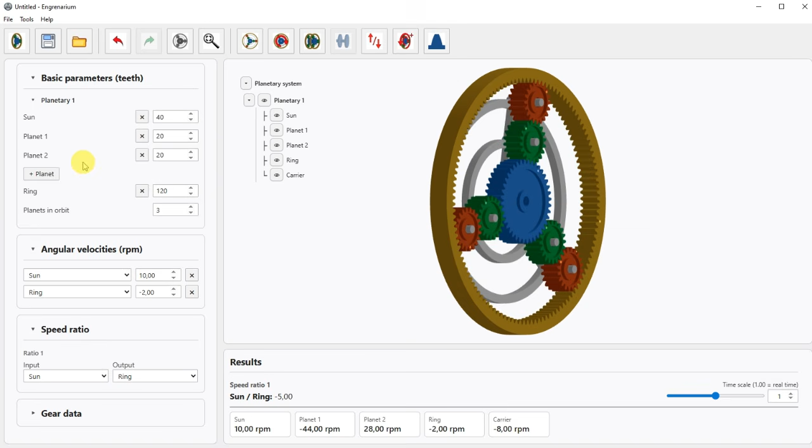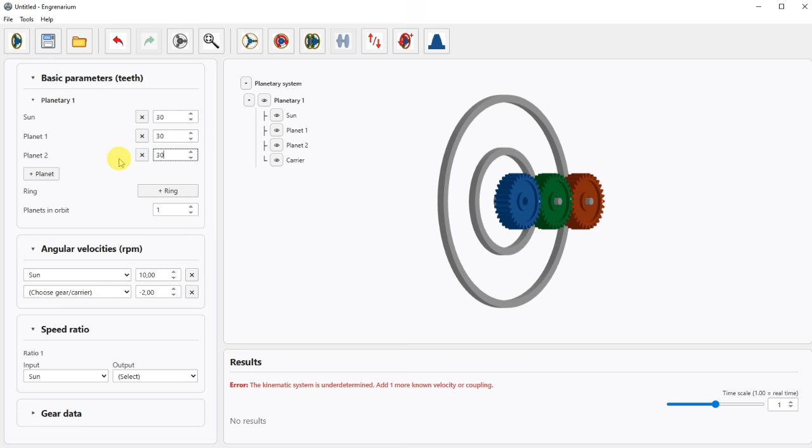Let us now learn how to build Ferguson's paradox mechanism so that we may then understand how it works. First, place 2 planet gears in series. Set each of them to 30 teeth. Then add 2 more similar planetary gear systems. Here comes the first secret of the mechanism. On the last gear of the second planetary system, set the number of teeth to 31. On the third planetary system, set it to 29 teeth.

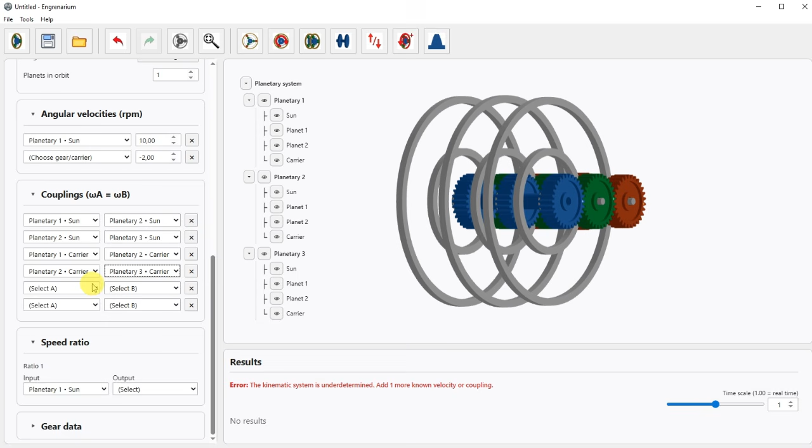Now make the proper couplings. The sun gears must behave as a single unit. Next, couple the carriers of the planetary systems. Then couple the first planet gear of each planetary system, so that they also behave as a single unit.

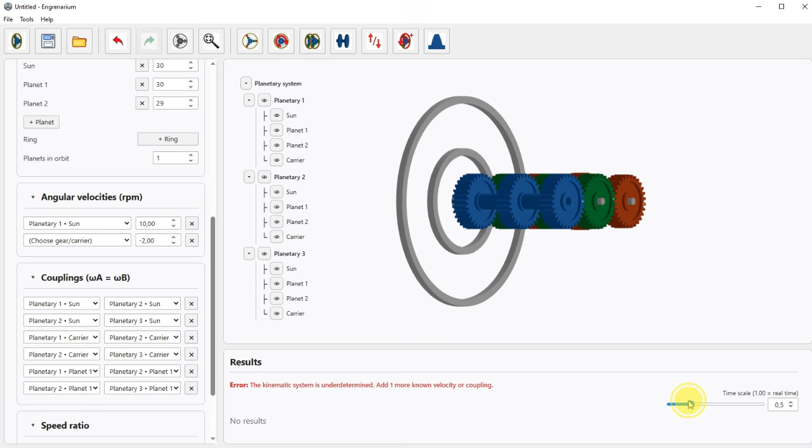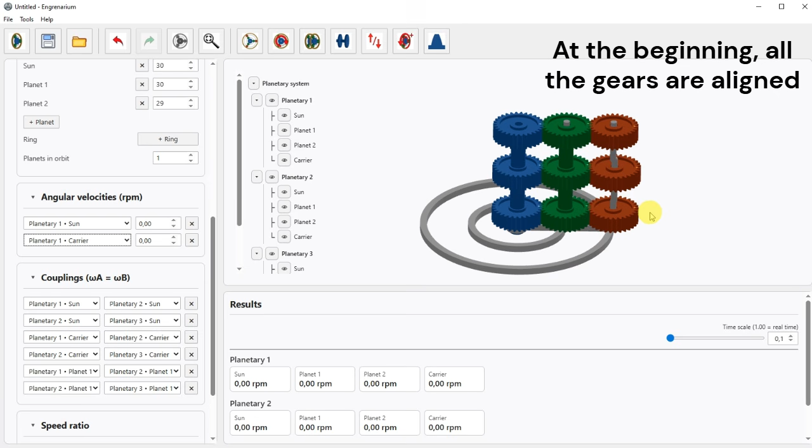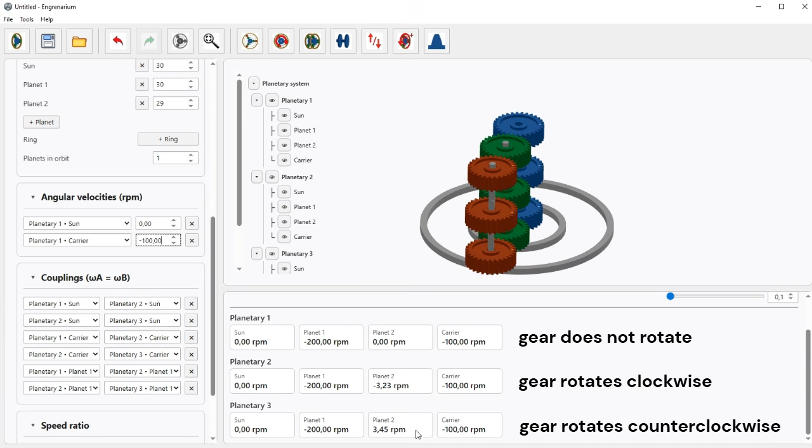Set the angular velocity of the sun gear to 0. Notice that, at the beginning, all the red gears are aligned. Set the carrier speed to -100 RPM so that it rotates clockwise. Observe how one of the gears does not rotate, another rotates clockwise, and the last one rotates counterclockwise.

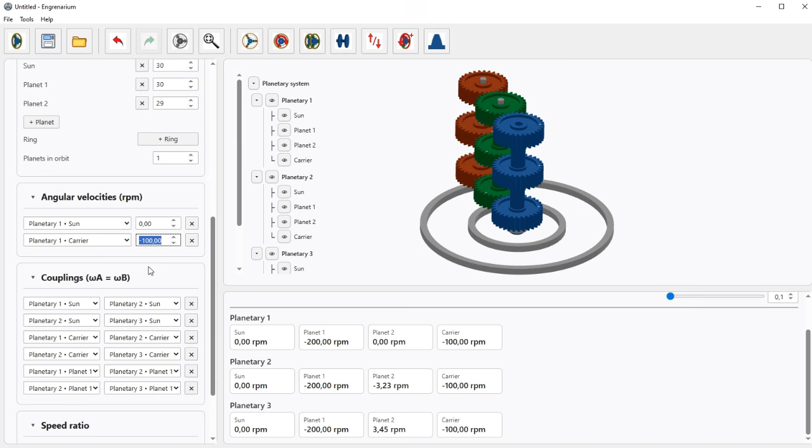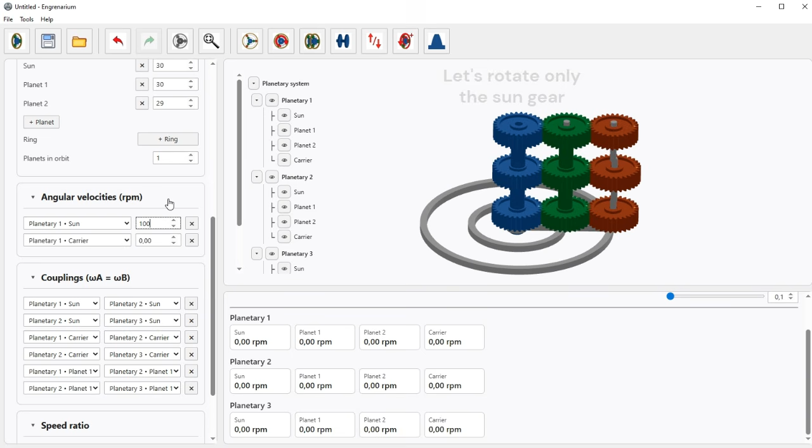When the planetary system is stopped, we can see how each gear has behaved. They truly rotate in 3 different ways. But how does this work? Let us rotate only the sun gear. All 3 gears rotate in the same direction. The differences in their speeds are due to the number of teeth on the red gears. With a difference of 1 tooth in each case, the speeds vary by about 3 RPM.

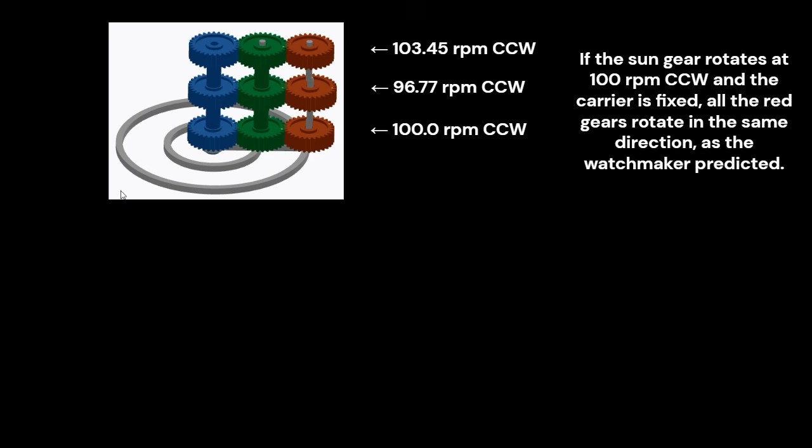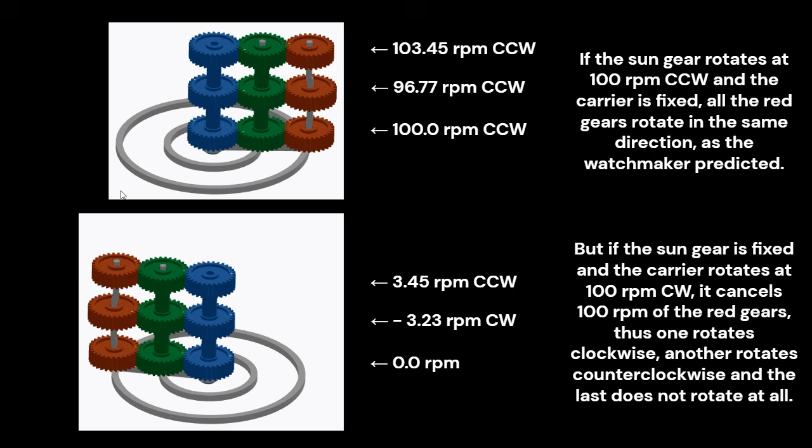If the sun gear rotates at 100 RPM counterclockwise and the carrier is fixed, all the red gears rotate in the same direction, just as the watchmaker predicted. But if the sun gear is fixed and the carrier rotates at 100 RPM clockwise, it cancels 100 RPM from the red gears. Thus, one rotates clockwise, another rotates counterclockwise, and the last does not rotate at all. Let us understand the mathematics behind it.

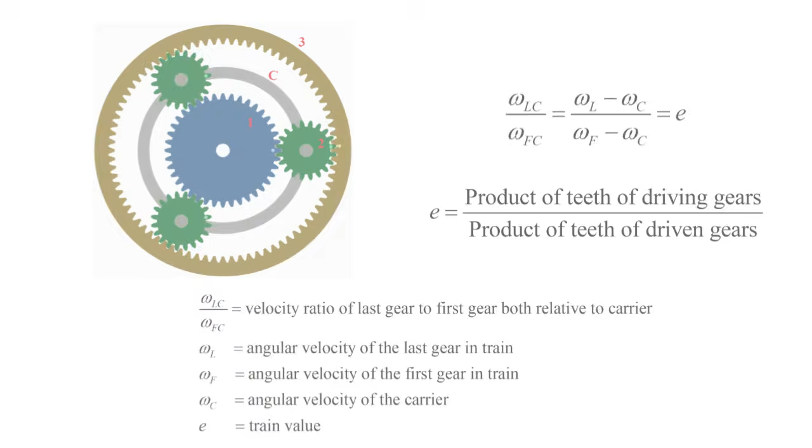When using the general formula for planetary gears, the idea is that when calculating the speed ratio of the last gear in a train relative to the first gear, with both measured relative to the carrier, the expression can be written as the angular velocity of the last gear minus the angular velocity of the carrier, divided by the angular velocity of the first gear minus the angular velocity of the carrier. This is equal to the train value, which is the product of the numbers of teeth of the driving gears divided by the product of the numbers of teeth of the driven gears. For this example, when assembling the train 1, 2, 3, the equation can be applied as shown.

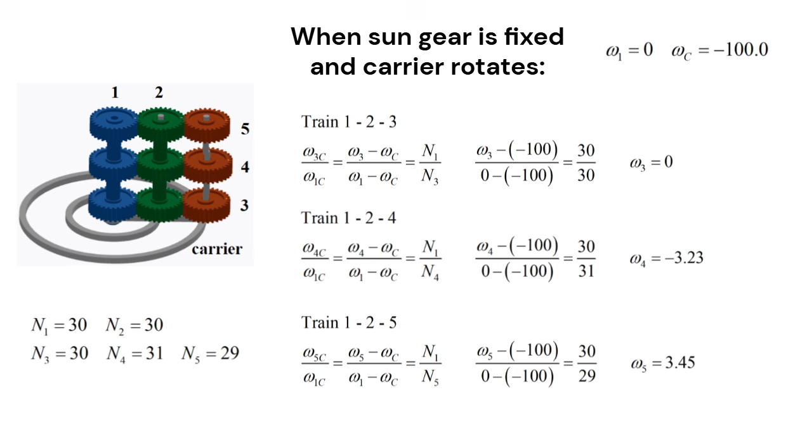Now, when the sun gear is fixed and the carrier rotates at 100 RPM clockwise, each of the gears has a different speed with different directions of rotation. For gear 3 with 30 teeth, the speed is 0, so it does not rotate. For gear 4 with 31 teeth, the speed is 3.23 RPM clockwise. For gear 5 with 29 teeth, the speed is 3.45 RPM counterclockwise. By changing only a single tooth in each of the gears, Ferguson managed to create a mechanism that seems to defy logic, but which has a perfectly plausible explanation.